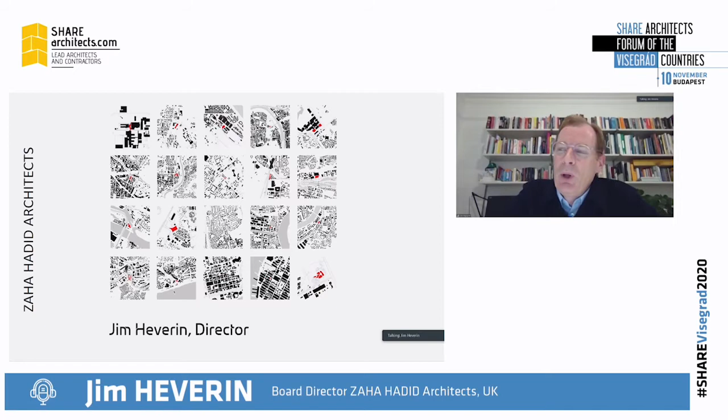Where I live, I was able to walk freely across streets. And suddenly I felt I was in Holland or in Copenhagen, and it became much more civil in London. And I think it gave us a glimpse of optimism. And I think I've seen through Europe some cities in particular grab hold of this opportunity and really use it as an opportunity to change our cities, because in particular traffic and cars have really turned our cities into something that needs to be addressed.

In London, we have huge issues with air quality, pollution, due to the density and quantities of cars. And we have significant issues in terms of just safety and how we get about our city. But I think it wasn't only that, there were many other levels to it. But I think we would all like to see out of COVID come a real opportunity for change.

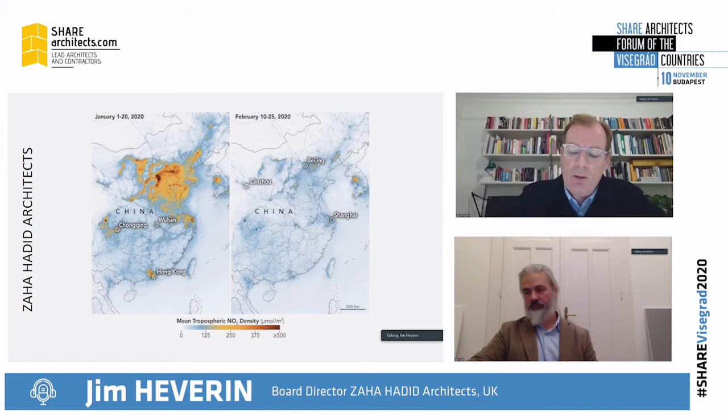And of course, what was great is it demonstrated the cost in terms of carbon and pollution. And that's something that China is looking to address, and something that we all need to start addressing in a much more constant fashion. And so I think this diagram is really just showing, obviously China first, then Europe and the States and everybody, how that necessity will come back in terms of returning to work, and the pollution levels will go back up.

And in our way of working in our occupation, there is obviously a lot of dialogue about whether this throws significant doubt on the idea of towns and cities, and I don't think it does. I think cities have faced these issues before, whether it was fire or disease, going back many centuries, and we've always looked and found solutions and overcome it.

But out of it, you would expect, as I was saying, this optimism and this hope and the real political momentum to see significant changes and quick changes in our cities, and not this constant lag and this constant need to compromise and dilute everything to the point of having no effect at all. And I would really hope for an acceleration. And again, I think for obvious reasons, a single party state, China is really going to be showing the way.

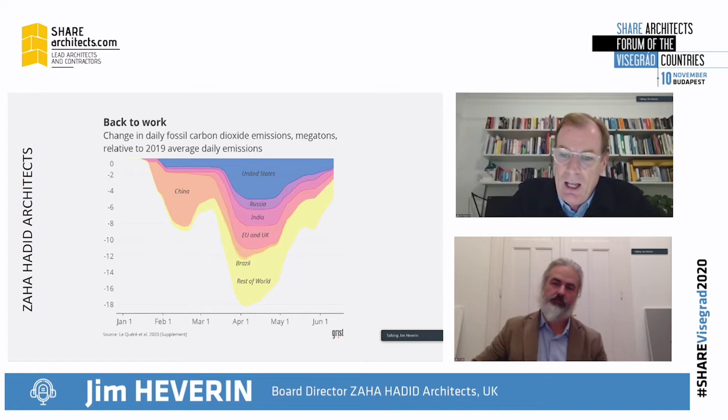And I think for us, we have seen immediately a pickup. There's no sitting back in China. So luckily for us, we were very well placed in China. We have an office in Hong Kong. We have an office in Beijing. We've been there for the last 20 years. And so like the last recession, this recession again, the Chinese jump in immediately. It becomes a stimulus in terms of pushing capital projects, and this is one.

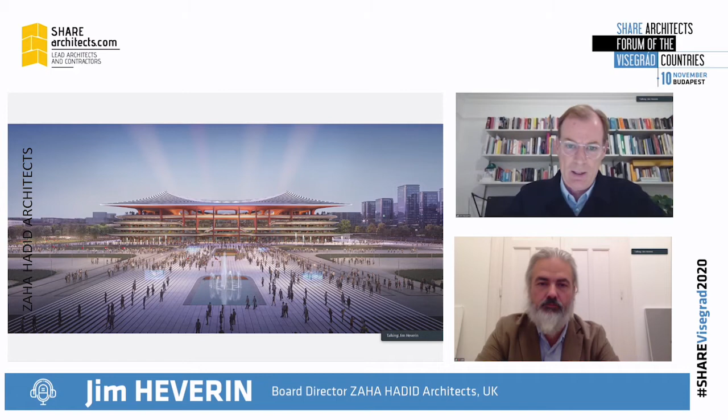So these are commissions that we have picked up in China in the COVID period. Some of them began beforehand. This is a stadium for their next Asian World Cup, later in the 2020s. It's in Xi'an, this historic city, so it's kind of based on temples, but it is showing the confidence of China. We also got this commission for Oppo. I don't know if you know Oppo, a large telecoms mobile manufacturer in China.

This is a very extravagant office building in Shenzhen, which is really expanding at such a phenomenal rate. And this project, of course, is not a kind of standard in terms of replication. This is a client looking to do something really unique, pushing the boundaries of glass. These will be insulated units, but they will be double curved and single curved, etc.

But we're also doing a lot of other types of work, which is much more rationalistic and repetitive and efficient, but also looking to capture the key characteristics we see in urban development in China, which is optimism, which is looking at mixed use.

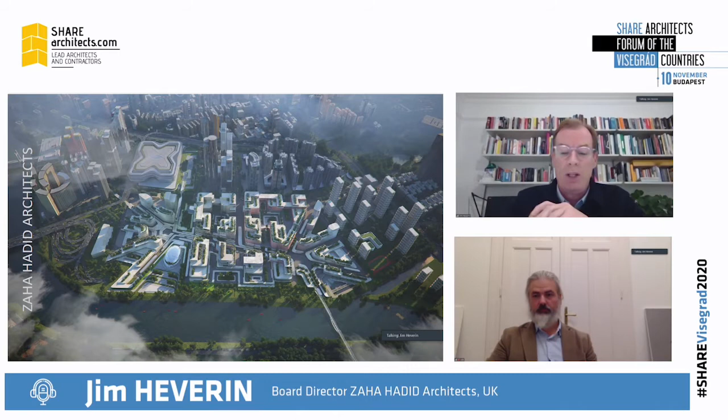This is a techno park, and we've done several of these current designs, all progressing at a pace, looking to create mixed use urban quarters where you're creating office spaces, living spaces, retail, recreational spaces, and all on the basis of everybody coming together in this new urban quarter, which is very much based on density.

And also for us, in terms of how we were responding in terms of design, it's the briefs coming forward. We're also focused on the humane aspect, the incorporation of nature, that these are walk cities, cycle cities. And so they're very human focused, and the scale, even though the density is there in the background, it's mixing the two.

And we have done similar work elsewhere. This is a commission we were lucky to win in Budapest, also mixed use on the edge of the city, mixing residential with office and retail.

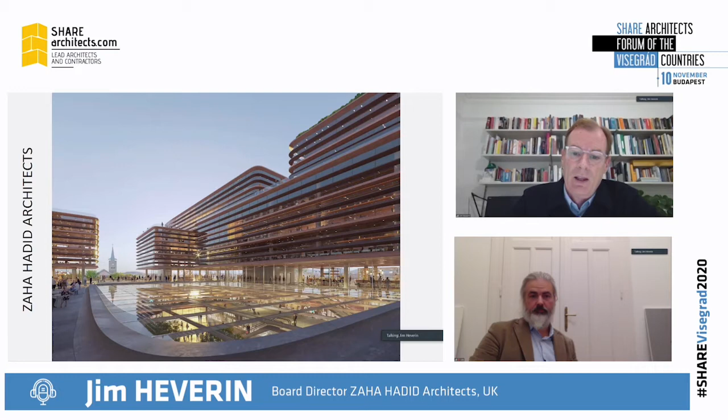And so all of this, I think, is really for us looking at the city, and I just want to talk today not only about the subjective aspects, because this is what we always talk about. What is the narrative? What is the poetics? How we approach the scale, the massing, the materiality, why this is appropriate, why this is more than just pure function, how it gets to an emotional level.

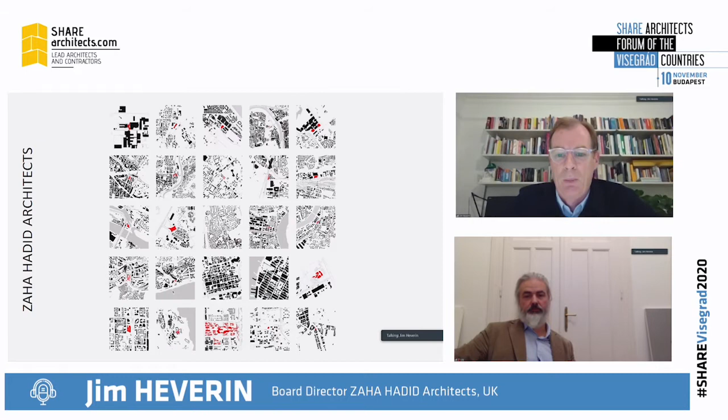But there's obviously a bigger crisis facing us, which is the climate crisis. And I think for once, architects can talk on an objective basis from project to project. And it's something that we are starting to have to look at as an office. And we're obviously looking at it from a point of view of an office that needs to do a lot better. So I'm not in any way pretending that we are an exemplar, but I think very few are.

But it gives me great hope when I see the mayor of Paris really grab the initiative out of COVID, introducing the 15-minute city, which I think we all know about, but really acting on it and really implementing it and really looking to start to change Paris. And I think there's real widespread support for it, and I would find that throughout many cities. And the only reason this hasn't happened in London to such an effect is because of the way the London mayor is financed.

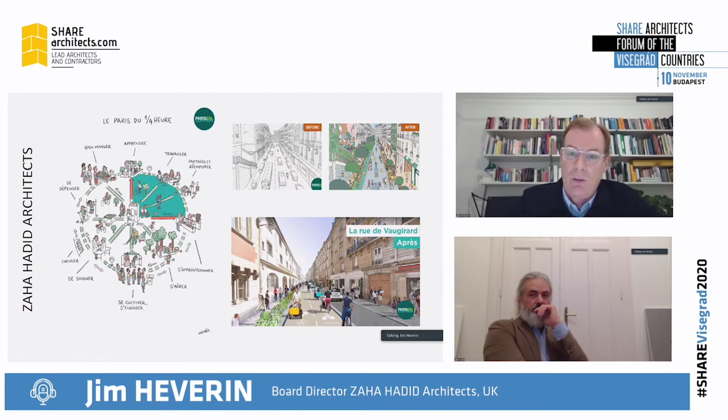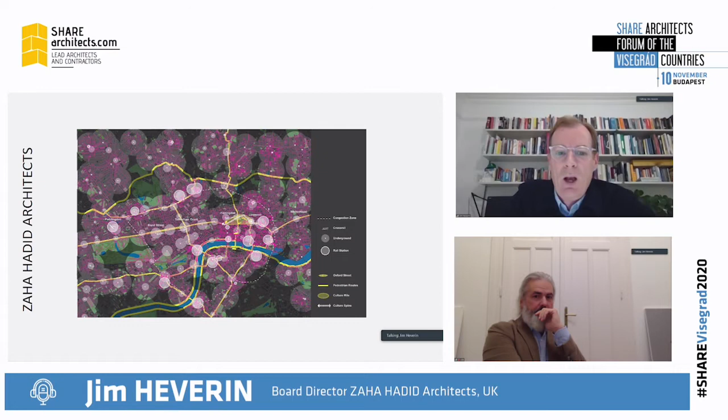Coincidentally, one of my partners, Patrick Schumacher, did a kind of study based on walking and how certain walk distances could connect the city together. But again, what was really impressive about Paris is the fact that it's almost going out in the night, transforming roads which were 2 lanes for cars, immediately taking over half of it for cycle lanes. And I think this really shows you the spirit in which we really need to tackle this and to turn it into a positive.

This is a positive for how we occupy and get about our cities, and we really need our politicians to take this moment to really work with us to change our cities. And I hope we're all aware of the UN IPCC report calling for action by 2030. And we think it's hugely significant that China is putting its weight into this and talking about being net zero by 2060. And we will, in all of those projects, start to see this become more and more of an issue in China, and hopefully elsewhere throughout the world.

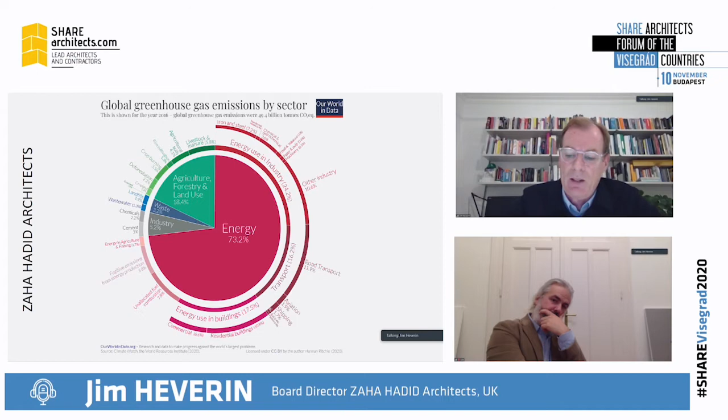And it's uncontestable, the amount of work that has to be done. And this is just looking at the split, and clearly most of this is in the production of energy, and then obviously you go on to agriculture. But you can see down the bottom, the energy in use in buildings at 17.5%. I know sometimes this 40% is used against the built environment. I personally find this a little bit misleading, because actually half of that is plug-in loads, such as the cooking or the computers.

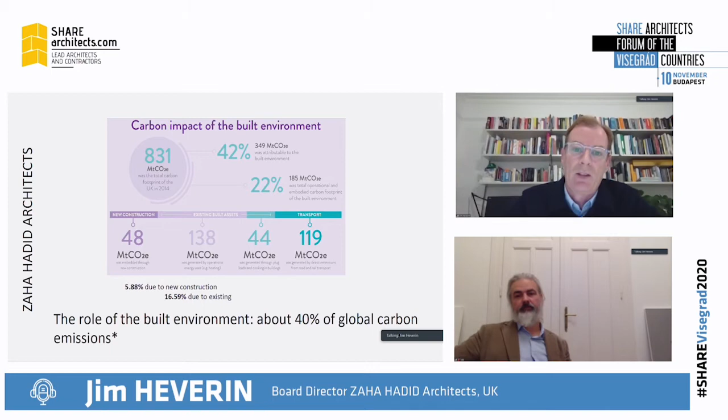The other quarter of that is actually rail and roads. So as much as I wish to beat up architects and contractors, they can't be beaten up for all of this, but they're still significant. And what's more significant is that about 6% is new builds, but 17% is due to existing fabric. And a lot of focus needs to be put on that, to not be demolishing buildings and to be refurbishing the existing buildings that we've got to a higher standard.

And it's for all of those reasons that we signed up to the UK Architects Declare, not because we thought about a greenwash or we thought it was good for PR, none of those things. We thought about it really to create another stick with which people can beat us, because there are plenty of sticks already, but this one we actually believe in. And this one, it's for us really to be constantly reminded that we need to do better. This is the only reason we added our name to this, and any profile that we've got is really to push ourselves to do better.

And from that, we've started to undertake a review of our past projects, our current projects, and our future projects. It's quite clear that all of these certifications are no longer ambitious enough. What has been quite good is this document, and I'm sure each country has an equivalent, but the RIBA, for once, actually produced a succinct, short, 4 to 6 page document that actually outlines clearly what we need to do.

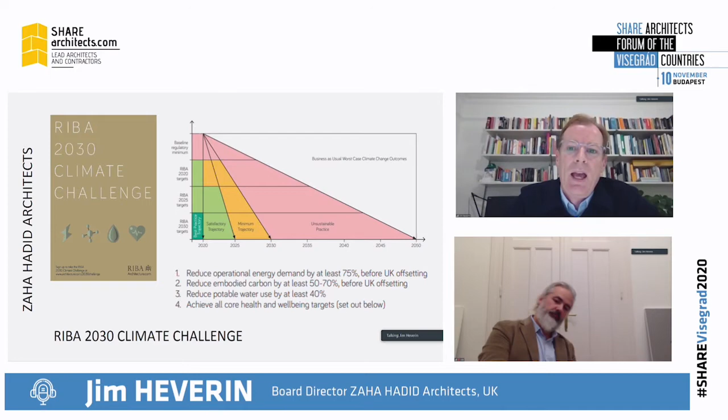And it's clearly on operational energy and embodied carbon. And on those two factors, all the rest of the stuff that you get sucked into on LEED about biodiversity, and all of this is really, really secondary or tertiary, or it's way down the list compared to these key carbon areas of consumption. And I would really recommend this document because it's very, very clear.

And so for us, we've started to look at this, and one of the issues for us is that we work in a diverse range of regions, from Europe to Asia to the States, etc. And of course, all of that could give us an excuse. We could constantly say, well, the statutory requirements are there. We find it very difficult to persuade clients, and all of that is true. But this is universal. The climate crisis is a universal matter that goes beyond any site boundary, and we are now duty obliged to have this conversation, no matter how difficult it is, in all different regions with all clients.

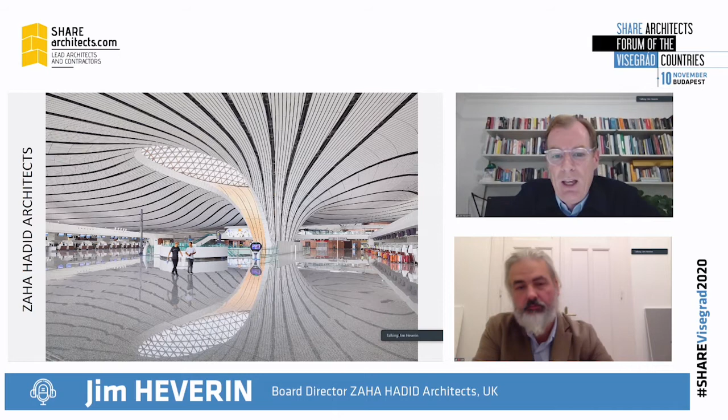And so these are some of our projects that we just finished in the last year, and we're looking at each of them, and obviously the first one is the large airport we finished in Beijing. And I know there's been a lot of criticism, I think mainly just within the architectural community, but I could be wrong, of aviation and architects' involvement in aviation. But I would make the argument that aviation is key to globalization. It's key to lifting people out of poverty. Aviation will continue to expand, and it needs to address its carbon footprint.

But I don't believe in this purist point of view that you start to cut off areas of our activity and say, no, we're not being involved in that. And then you remain in your ivory tower and you somehow don't engage with the world. We don't believe in that, but we do believe that obviously aviation has a lot to do.

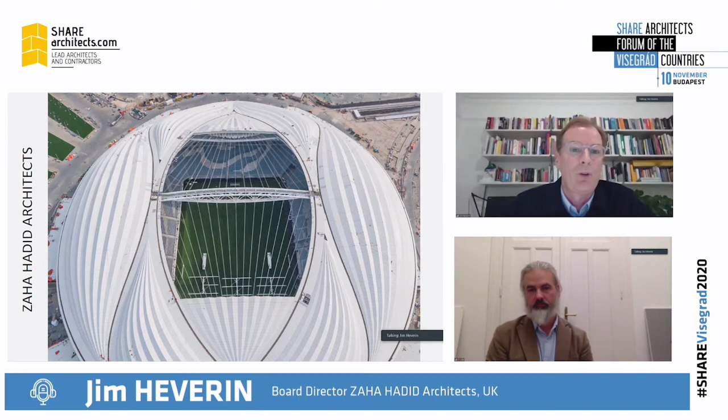Same with national and international sporting events. So this is the stadium we just finished in Qatar, a beautiful thing, part of a beautiful football tournament. And we will still want these types of tournaments where people come together and congregate. And as a world and as a community, these are immensely useful for intercommunication. And in this stadium, this was a program that wanted to address carbon, and it was a discussion. Unfortunately, in the end, one of the key aspects addressing that was not implemented, which was the use of timber.

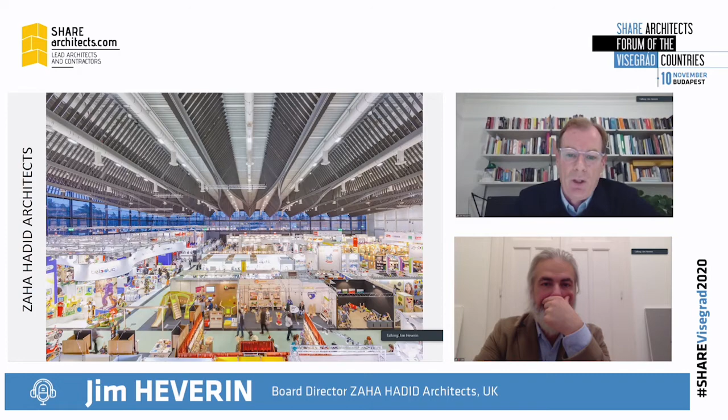And this is just another project we completed in Nuremberg, but also a project we completed in Hamburg. And all of these, we have to look at them, particularly from the embodied carbon point of view. And again, sand, gravel, crushed rock, which is obviously the key aggregate ingredients of concrete.

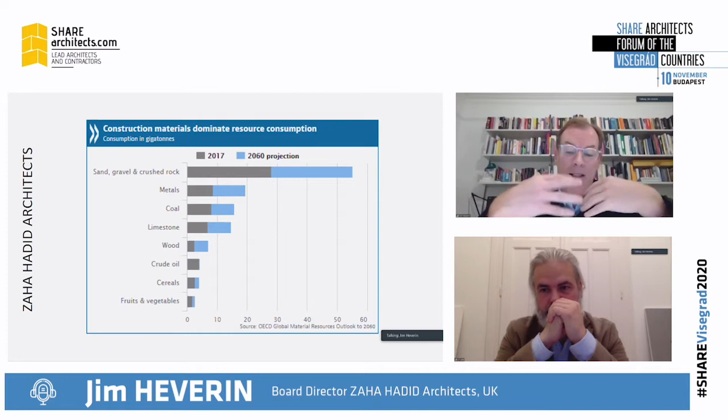And again, we don't participate in this point of view that you could somehow replace concrete with timber, or you could replace it with stone, which is a ludicrous argument. And the issue with concrete is just that it's so immensely successful as a material. It takes local sand and gravel, mixes it with cement, which usually has to come imported, and its success at actually using that and being cost effective and efficient, and there are ways to address it which needs to be done.

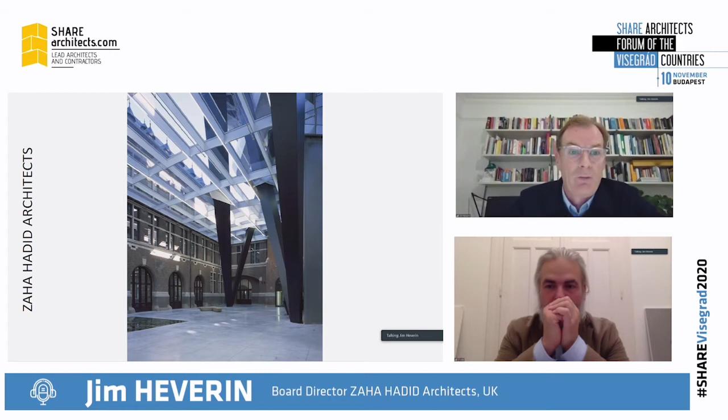Of course, the starting point in any project is to reuse structures, and we see far too much demolition happening. If I just think about the UK in particular, there seems to be a rampant participation by architects to particularly demolish post-war modernist buildings on the pretense of upgrading them for performance. So whilst this is a project we did in Antwerp, retaining a building that looks Victorian or turn-of-the-century, but actually it was built after the war, I would really make the argument against any architect who's involved in the demolition of post-war buildings.

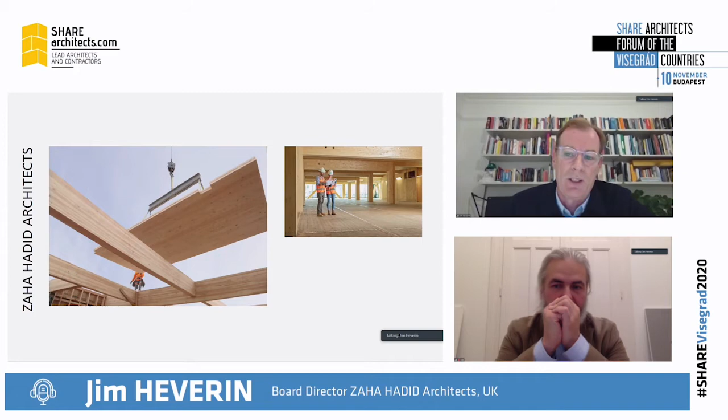But we have looked extensively at the use of timber, but there is a degree to which its use, just from pure structural efficiency, reaches kind of capacity issues. And this is looking at glulam and CLT planks. And when you start to look at it for offices where you have long spans, it becomes heavy and clunky. And I would really say hybrids, where you're using steel or concrete combined with timber. And I know many architects are looking at this.

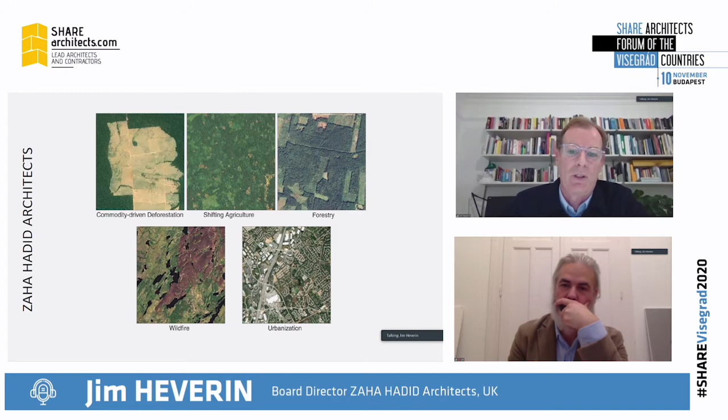But there is a downside to timber, which is that unless it comes from a renewable source, it feeds into all of these issues, from deforestation to the urbanization that comes in its wake. And unless timber is coming from a certified renewable source, and unless it's traveling a short distance from where it is sourced to where it's being used, you're just adding up the carbon. So it's not this easy calculation that you take out concrete and you just throw timber in. If it's traveling halfway across the world to get to site, it's a false economy.

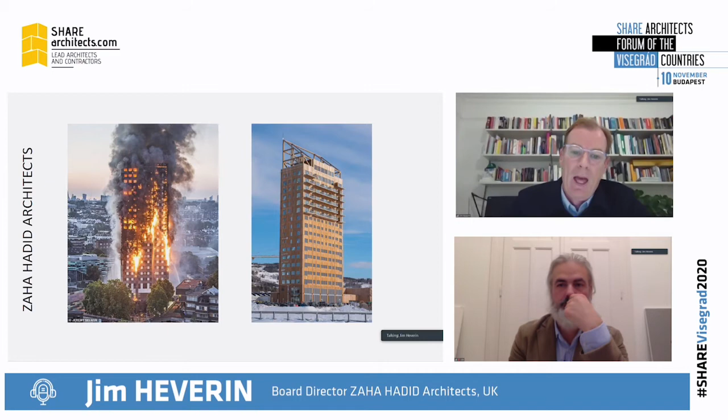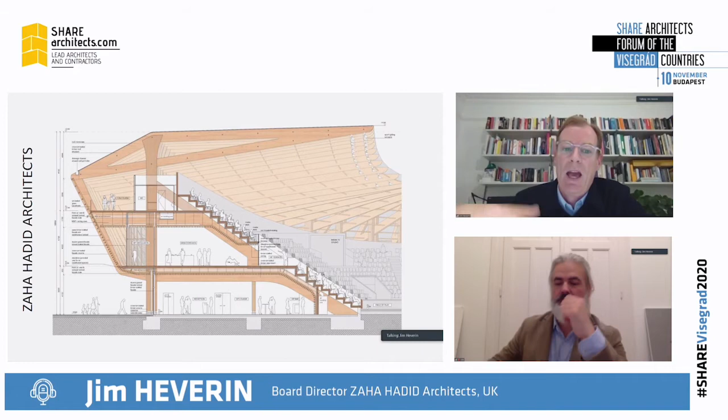But we ourselves have looked at using timber. This came out of our multiple stadium iterations. We found a client that wanted to do the most sustainable stadium. So we proposed to him, why not do everything in timber? Not only the roof structure, which is obvious, but also the rakers, the seating terraces, using glulam and CLT, and been able to create something that looks appealing, that's not wearing its credentials on its sleeve, but is dynamic and attractive, and uses very traditional techniques of the twin column with the beam.

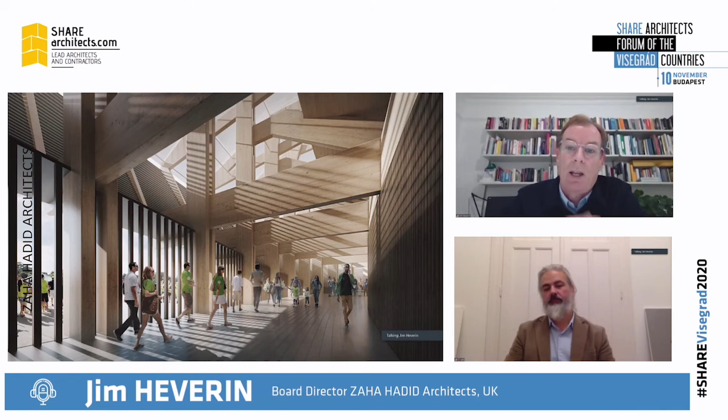But even this project, which is to be based in Britain, will face issues of where this timber comes from, because nobody in the UK makes engineered timber like this. So we will have to factor in getting this from France or Austria or wherever, unless somebody in the UK starts to produce it, and I hope they do. But at the moment, that would be something that needs to be factored in.

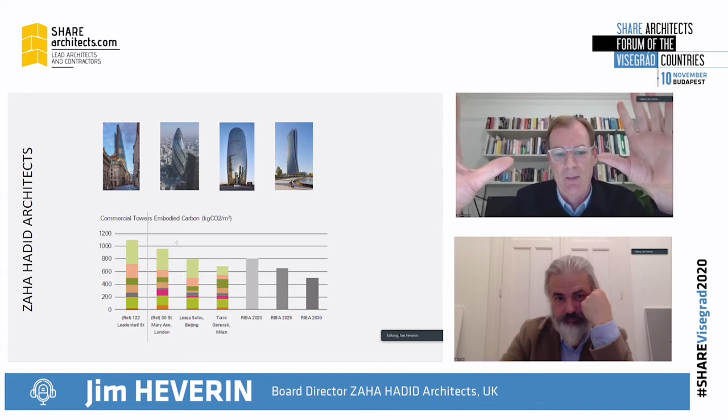And then this is part of the low carbon review that we did. On the right-hand side are two of our recent towers, one in Milan and one in Beijing. And then we compared them, with the help of Max Fordham's engineers, with the embodied carbon in two landmarks in London: the Leadenhall, the more recent one on the far left, and the Gherkin, or 30 St Mary Axe, as its proper name is. And it's a little bit unfair, because the Gherkin is actually a very innovative tower project using atriums, etc.

But it is really just looking at the embodied carbon in these projects. Surprisingly, we did well in Beijing. The Milan project did best because it used recycled aggregate from the buildings that it crushed on site. So there was no transportation, and the concrete was made on site, which is why it did so well.

But it just shows you, if you then look at the targets, all of these buildings are just about hitting the RIBA 2020 target. The two projects by us are just about hitting it. We might scrape in with the 2025, but 2030...

And that really just shows you what's ahead of all of us. This is not something that should be the exceptional. This is something that if we are to do what the UN is telling us, and if we are to see off this increase, and if architects and the built environment is to do its bit, we are going to have to reach these targets for every building, not the exceptional tower in Milan.

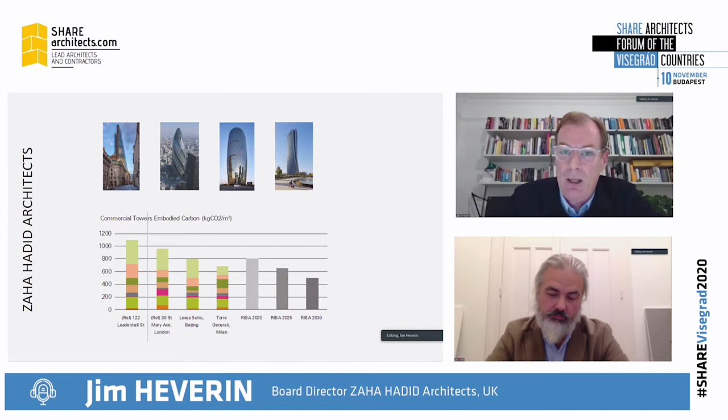And so this is the message that we are taking internally, that this is a huge issue. And of course, we can't get away - like I was saying, our concrete, or the use of concrete, has been fundamental to our practice. We believe the very fact that it is so common is why it is such a contemporary material.

And it's not something... but we have looked at using cement replacements, or in this case, looking at using GGBS, and also using recycled aggregates. And I think very successfully to get the kind of fair face finish that when you strike it, it has this blue kind of hue to it. And then over time, it returns to the normal grayish tones.

So we found this to be the first project we did in 2012 using the specification. And now for us, we need to try and use this for every project where we're using concrete. And in the UK, we've been able to do so. This is a project we did in Oxford. And I think really the challenge for us is to start to persuade this to happen in China and other markets where we're operating.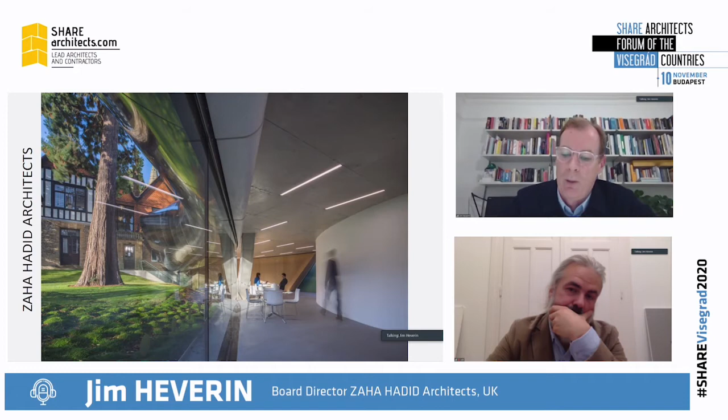And it brings us on to the other issue, which is the airtightness and the level of insulation. I think these are key factors - pushing beyond what's in the regulations, and also then testing how you achieve it. So this is a project we did in Glasgow.

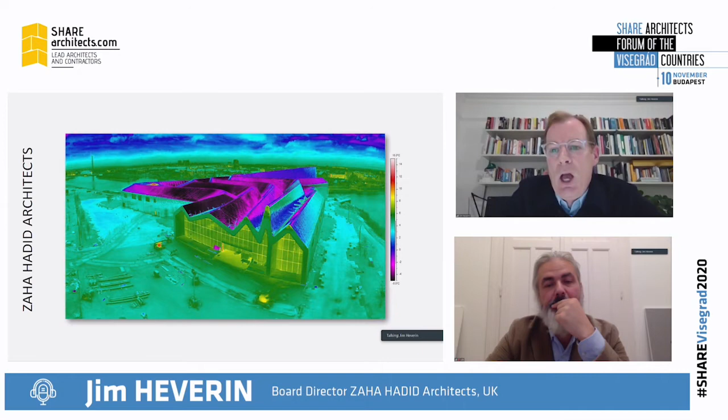Okay, it's a big shed, which is why this infrared camera shows it to be working so well. There's very few openings. But on this, we achieved quite a good air tightness, just for the sake of the fact that there was very few windows. But what's key to us is that going forward, that level of air tightness you'll have to achieve on all types of building, offices and residential buildings with many, many types of openings.

And of course, the key to it is the quality of construction and the thought and accuracy that goes into the detailing, and likewise into the construction, which is why it's so interesting to see the off-site manufacturing discussions. But of course, the frame and the structure is where a lot of the energy is used.

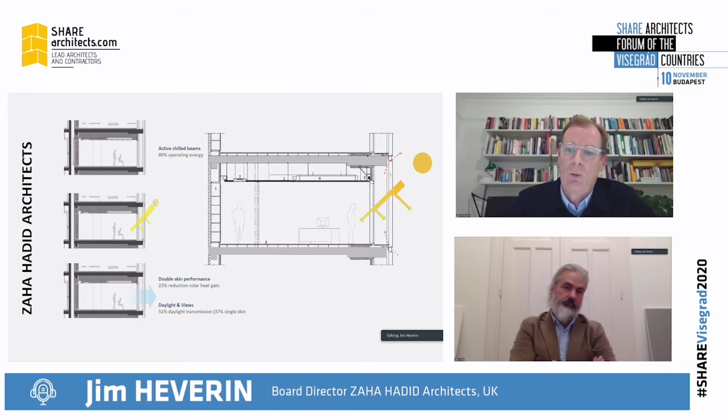This is a similar project to Milan that we completed in Marseille with a double facade. Again, the concrete, but the double facade, unlike the Milan tower, was not a ventilated facade. This is just a naturally ventilated outer glazed screen, which significantly cut down the solar gains and allowed us to use chill beams, which is the first time chill beams had ever been taken from Northern Europe and used in the Mediterranean.

And again, just following through - this has been completed since 15, and we've been back, and the chill beams and the overall energy consumption - the client is really very happy with both how the chill beams are working and the double facade and the level of reduced energy that they're having to pay for and use in the building.

And it's something that we took on to a project when we had a commission to do a tower bank, the central bank of Iraq. So obviously, even in a more extreme climate than the Mediterranean, looking at using fins to reduce the amount of solar gain while at the same time balancing that with daylight.

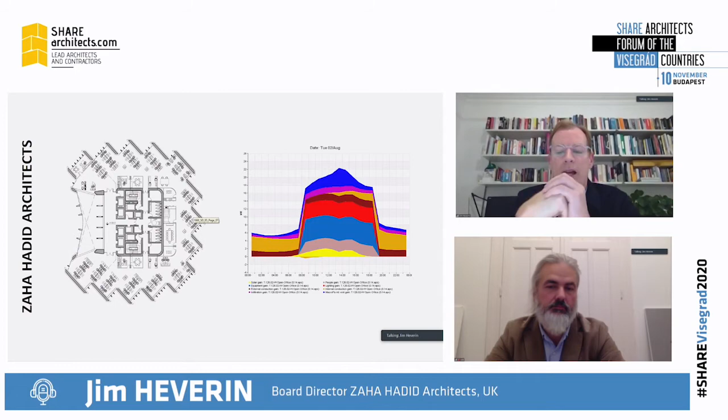And it's really the analytical side to this, understanding the metrics and being aware of this and feeding that into the design. It still didn't stop us from creating a very iconic, complicated facade, which is on site at the moment.

And I take the criticism that this is using too much materials. Again, it's something we looked at for a project in London, using a kit of parts and how those kit of parts could be put together in the most efficient way.

So the overall kit between glass and precast creates the depth, the shading, the low glazing to solid ratios, so that you have an overall low carbon design, but also the most efficient use of materials. For us, it's a constantly moving circle of all these components. This is something we're giving a lot of thought to, and self-criticism, to do better and take this into our projects going forward.